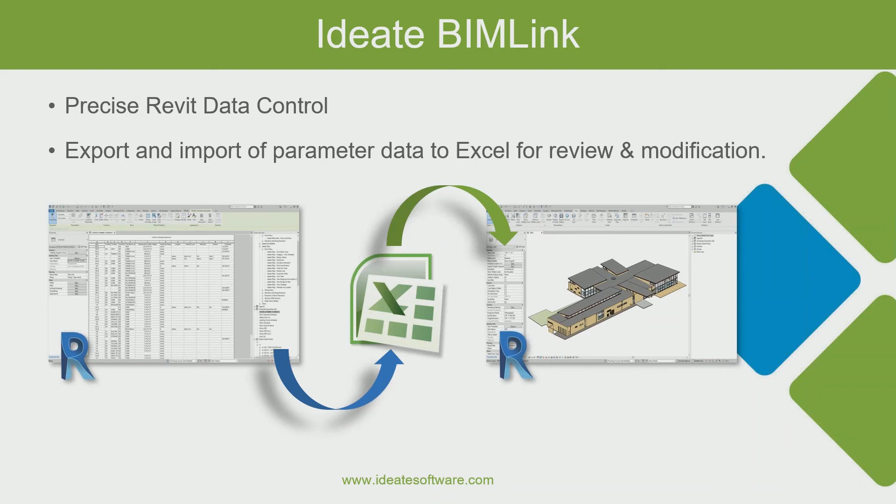So what we've done is we've added, again, these are requests that we see from our customers. In the view templates, you were always able to rename the view template and assign the template to different views. But when you look at the properties of that view template, the controls, a lot of those controls weren't accessible. So that was a request from our customers to have more control.

So what we've done is we've added top-level access to the properties that you see on the screen here that are in yellow. And what I mean by top-level properties is, a good example is the VG overrides. That's where you say edit, another dialog box appears, and you actually have to go into what I'd call subcategories, or multiple dialog windows. In that case, that was difficult for us because the way that the Revit interface is designed, there actually were several dialogues.

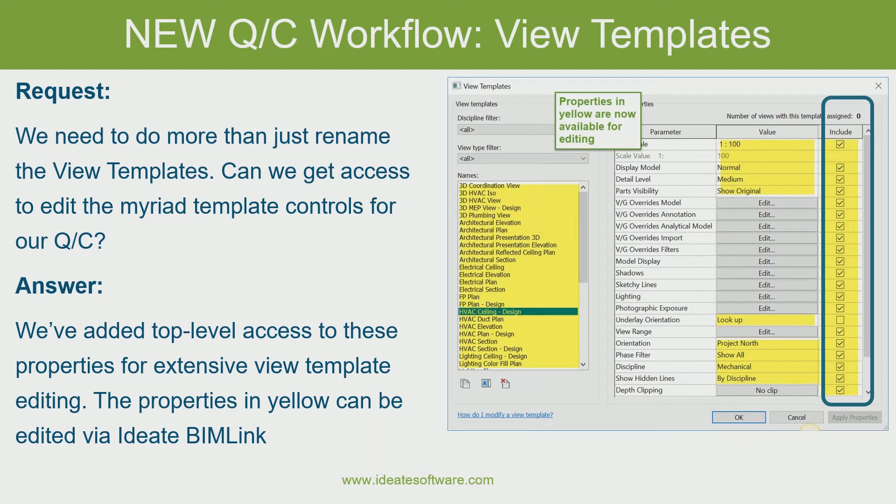So those that don't require a separate dialogue where you have to go into multiple areas are now able to be controlled. So that's why I say top level categories. So you see there as an example, being able to display the model, or detail level as medium, fine, or coarse. Those things can now be controlled much easier.

And so you'll see there an example of being able to tick that, the fact that you can apply the VG overrides. You can apply the detail level, or in this case, the discipline. You have access to whether it's architectural, structural, coordination, or MEP. So a lot more control over the individual properties of the view templates, not just allowing you to apply them to a view, but being able to manipulate the properties.

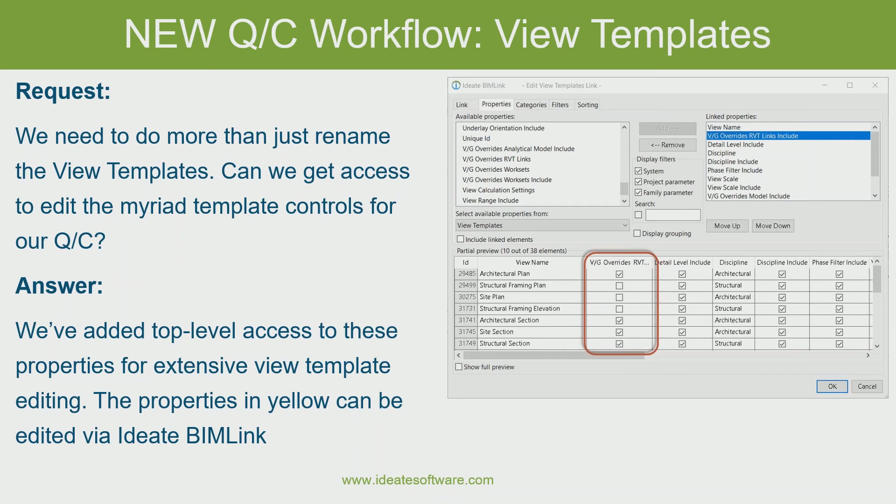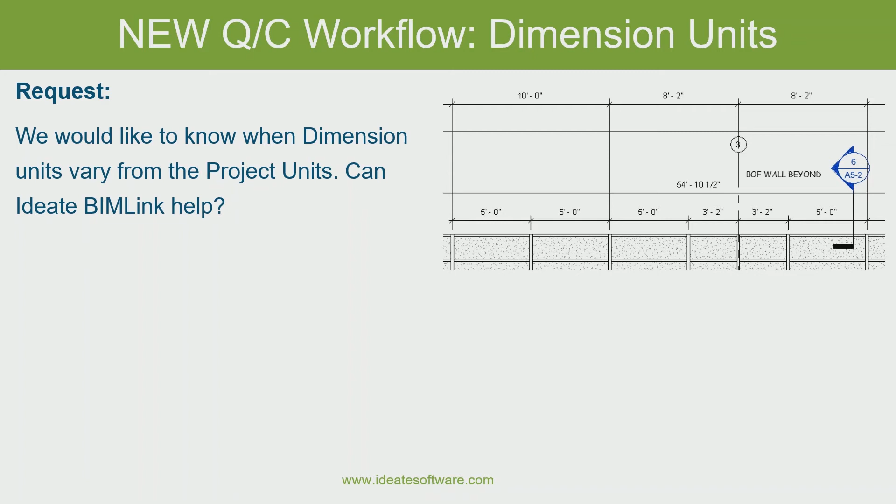And then another request that came in is being able to understand if the dimensions vary from the project unit, so in Revit, you set what the default project unit is for your dimensions. So now we've added the ability to say that we have alternate units here, and then there's a unit format, so now we've added a couple to our link definitions. And if you're familiar with Ideate BIMLink, you know that we do a lot of work up front to define these link definitions, to get you started.

So I'm going to switch over here to Revit real quickly and just come over here to my Ideate Software tab. And just to highlight again, when I talk about these link definitions, what I'm doing here is doing the load sample, right? And so when I typed in QC, I can go down to my quality control links, and you see there's all the QC links that I have here.

So for instance, in that particular case we were talking about QC dimensions. So let's come over here and search here for dimensions, right? And now that particular link has those properties built in by default. So now you notice that I see alternate units prefix, alternate units suffix.

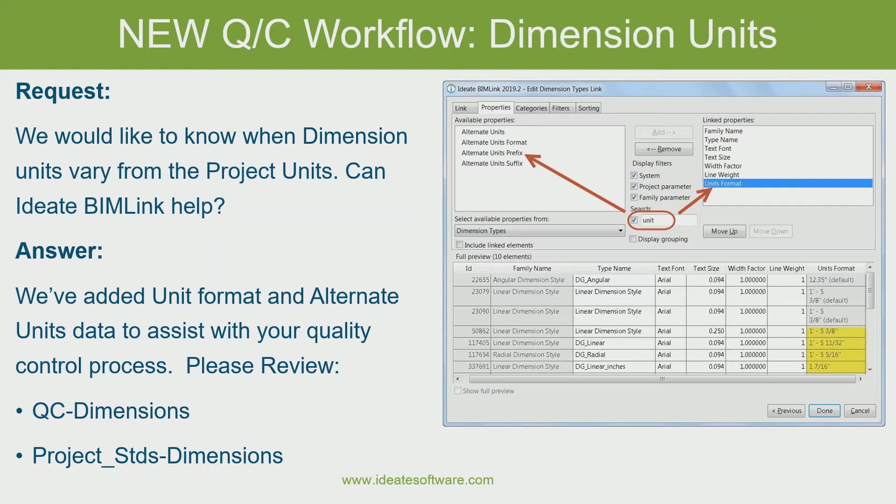So we've set that up for you. And of course, at any time, if you don't like that as an example, like the prefix or suffix, you can remove those, or you can just modify these sample links however you like. But under the QC dimensions and the project standard dimensions, you now have those available properties.

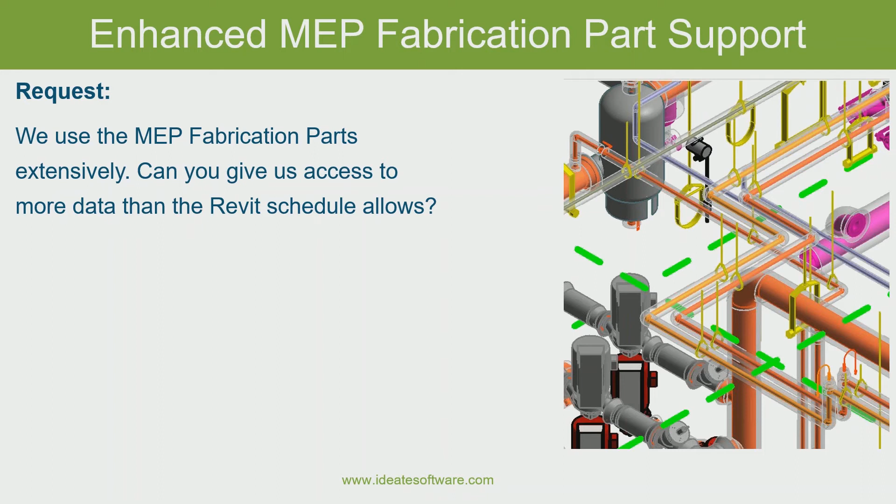And then we've added a lot of MEP fabrication part support. If this is your particular area in MEP, you know that Autodesk has made a lot of advancements on the fabrication side of things. And so we want to make sure that we're accessing that data. So now we have new links, and you'll see here, if I just type in FAB into the search window, all of these MEP fabrication, containment, ductwork, hangers, pipework are now available as default links that are already defined for you to use.

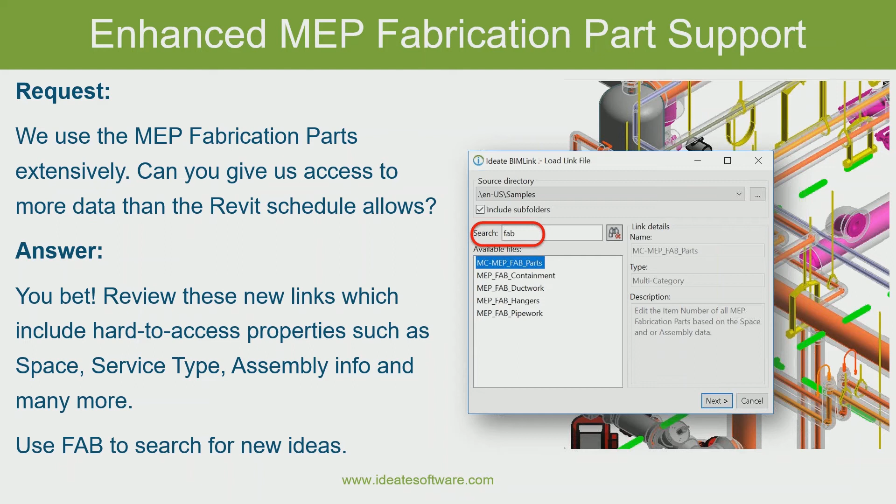And then, we had people requesting the fact that they weren't making any changes to the link definition, but because of the way that Ideate BIMLink worked, if there were multiple people in the file, it was basically locking out the first person that opened up BIM Link. And even if you were just exporting a link, it would say you don't have access to that. Now we're not checking out that data storage element for exporting and importing.

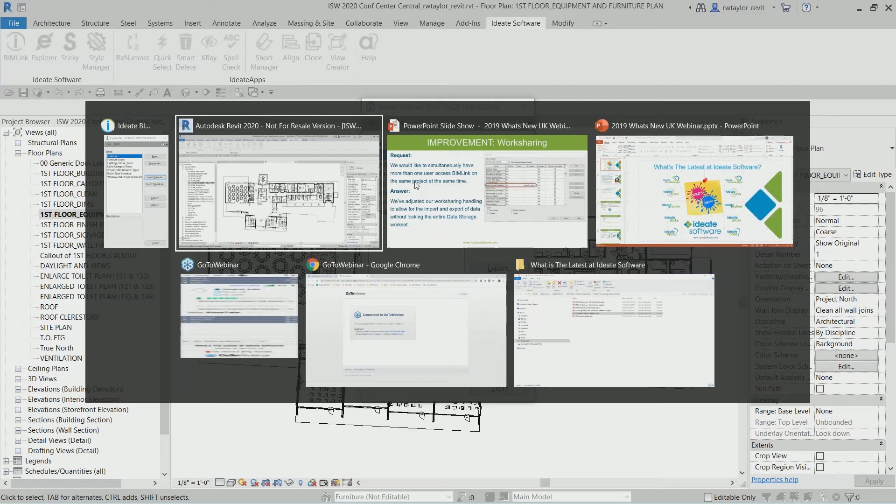So someone that's making a change to the link, like in this particular case, I'm in BIM Link and I'm, let's say, adding some properties, I've actually checked out that data storage link. But if another person is in the same project and also using BIM Link, they have the ability now to just say, I want to take this furniture and export it, or import it. So the two aren't conflicting. So if you are in a larger firm where you've got multiple instances of Ideate BIMLink in the same project, they're going to be working and playing together a little bit easier.

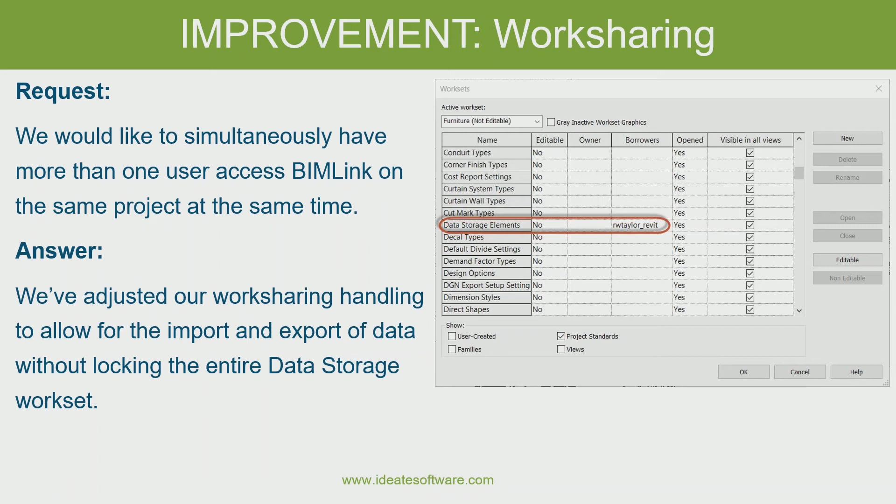And then, as I mentioned, we did a point release in November of last year. What we've typically done is release the major version to coincide with the Revit version. In this case, Revit was updated to 2020 in April. So just a few weeks after, we updated all of our software solutions to 2020 and also added new features and enhancements.

But along the year, we typically do a point release. So I just wanted to highlight some of those things from BIM Link from last year, which was we added the live editing, which I'm going to show in a moment. I'm not going to read every single bullet point here, but we did make quite a few enhancements and feature updates to Ideate BIMLink in November 2018.

And one of the largest things that maybe people aren't aware of is this new live editing, meaning that if you're working with Ideate BIMLink, exporting the information to Excel, making changes, importing that data back, now you don't necessarily have to go to Excel for, typically, small changes. If you want to modify right in the dialog, you can do that. So we've added this live editing.

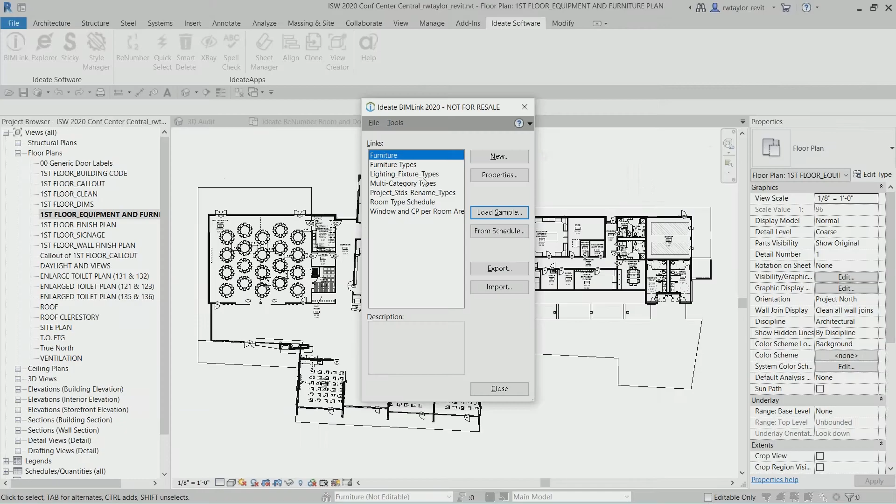So now I'll switch over to Revit, and we're going to say from schedule, and I'm going to come down to my existing schedules in my project, go to a room schedule here and say next. You'll notice that the properties I have are the room number, the room name, the room area. And I've got some finishes here that I might want to remove for this particular link. So now I'm just showing the room number, the name, the area, and the room type.

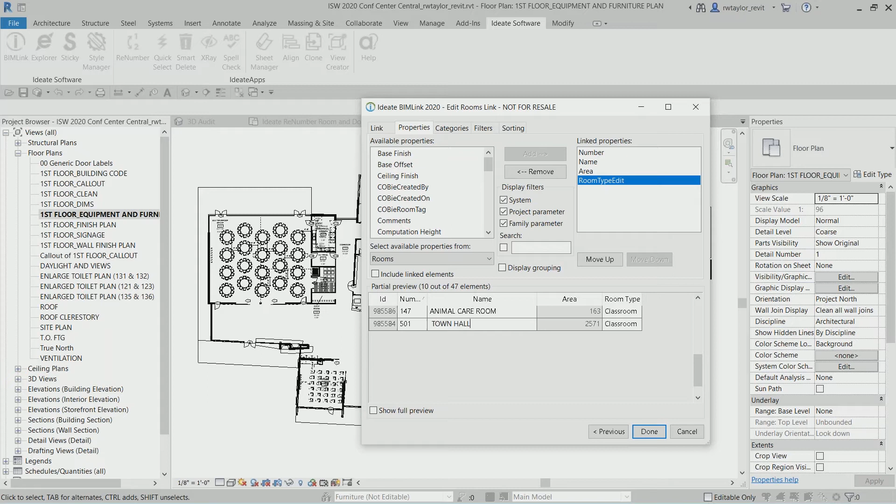And this is now a live dialogue. So if I come over here and say that the room number is going to be 501, and this is now going to be, I'm going to do my caps lock on here, a town hall meeting space. And now when I say done, that initiates that change.

So if I go over here and zoom up, you can see that now I've updated that information to town hall meeting space. So I've changed that room. If I look at the properties here, you notice that the name is now town hall meeting space, and the room number is 501 over here in the properties palette.

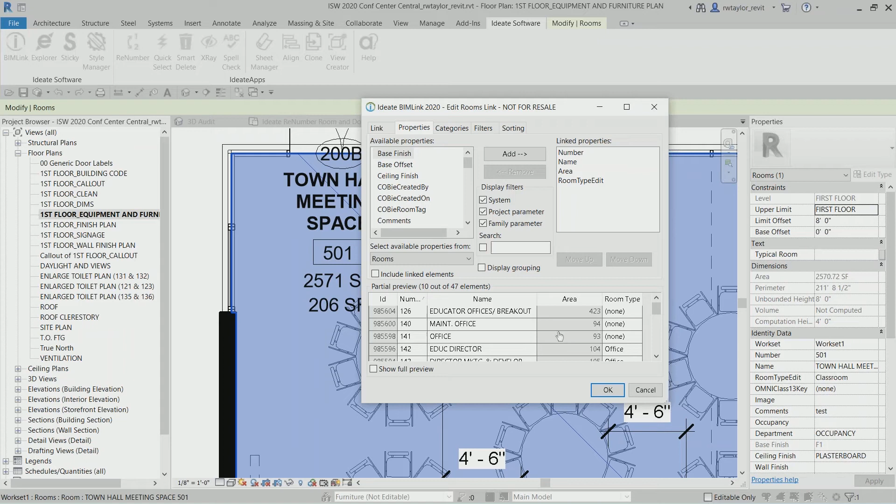So that Ideate BIMLink dialog is active. So again, let's go to the room schedule here, so the properties, for anything that you want to change. And you'll notice that obviously the area is something that I can't change. That's a read-only Revit category.

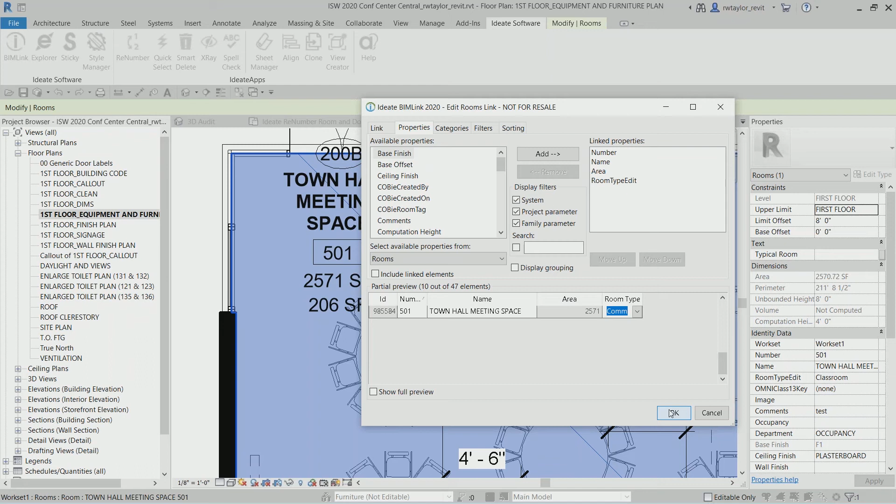But if I wanted to go back to that same room, the town hall meeting space, and change it from a classroom to something else, I now have that available. So maybe that is a common space as an example. So now I'm changing that room type as well. And then when I select on that, you'll notice the room type is now over here in the properties palette: common.

So I think Excel is still excellent for if you're making large changes, but if you need to make those smaller changes, or you want to stay within BIMLink and not have to export out to Excel, that's a really nice feature to be able to do that live editing.

And then we also in November gave you a lot more ability to change information in object styles. We were always able to have certain properties associated with them that we could change. But now we can do things like change the line color and the line pattern and the line style. So a lot more of the properties are exposed, not just for reviewing, but also editing.

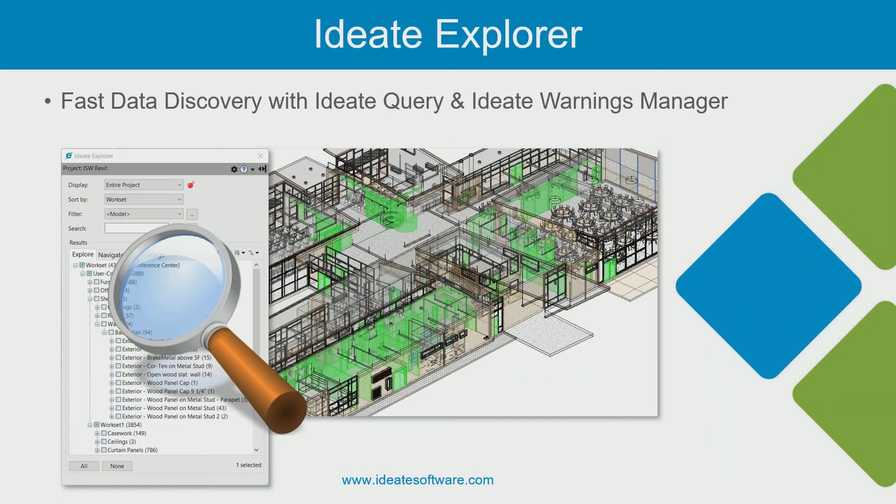Okay, so that's kind of a quick overview of Ideate BIMLink. Now I'd like to get to our next solution, which is called Ideate Explorer. If you're familiar with Ideate Explorer, it's all about fast data discovery of your Revit project with our Ideate Query and our Ideate Warnings Manager. Hopefully you're familiar with the Warnings Manager. We added that a little over a year ago, and we've continued to improve the warnings tab and the warnings tools.

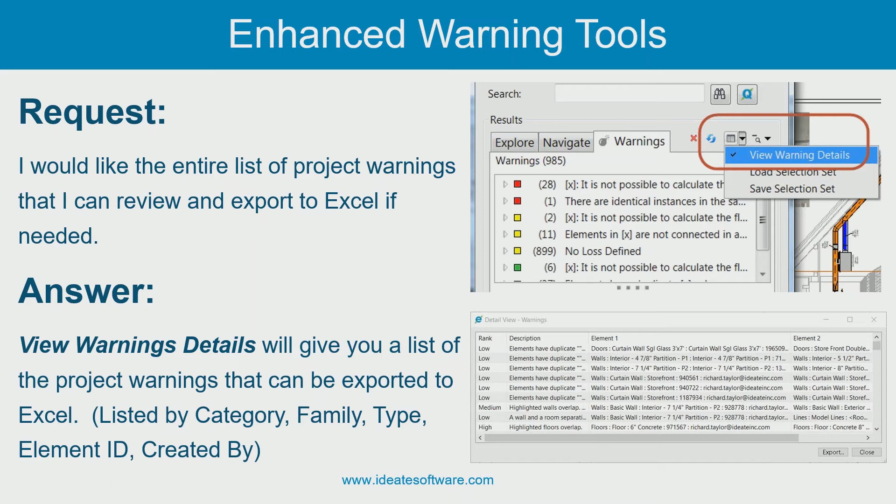So one of the things that people had asked us is they'd like to be able to have a list of all the warnings within the project and be able to export that. And so now we're able to view a detail list of all the warnings, as you see there, in our normal detail view, and then export that to Excel. It's listing category, family type, element ID, and the created by for the warning. So that's a nice feature.

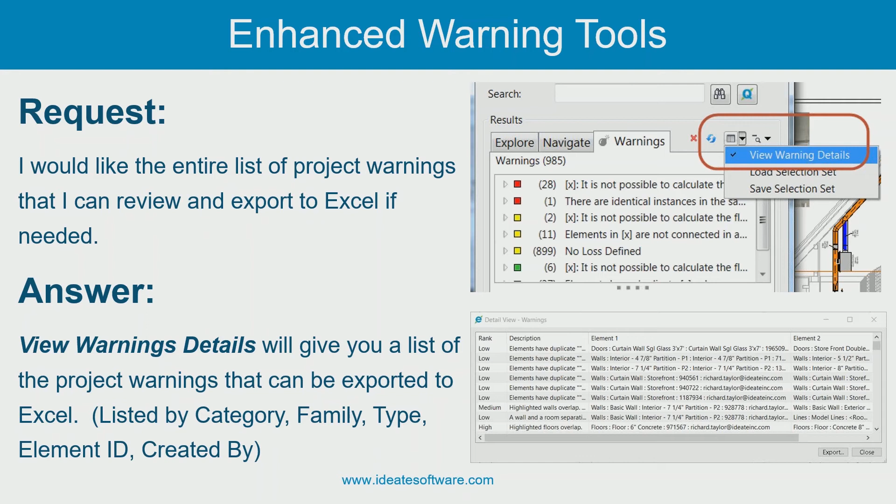And then we have a new workflow here that allows you to actually fix some very common warnings, like the duplicate instances. So now you can right click and say retain originals or retain latest. And I thought I'd show you that. So if I come over here to Revit again, let's bring up Ideate Explorer.

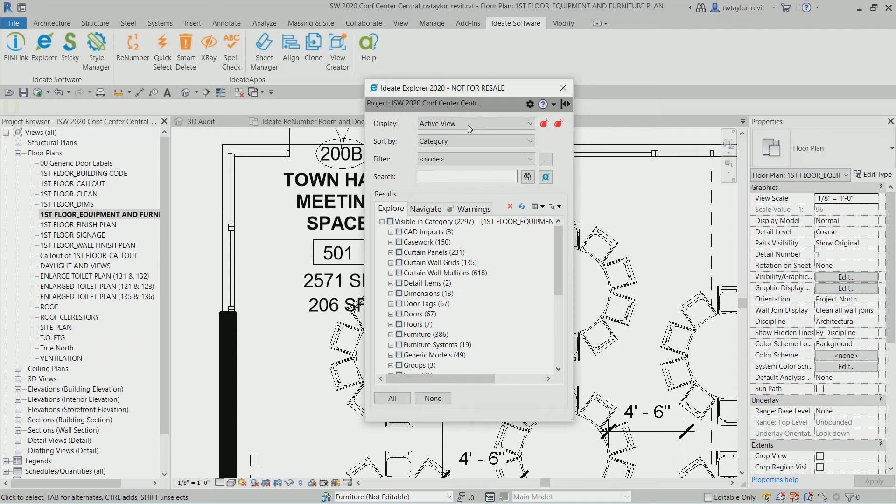And like I said, hopefully you're familiar with the fact that we now have our warnings tab. I'm going to switch over to the entire project here. This is showing me all elements. I've got 36,000 elements here, and the Explore tree has all of them organized by category. But Navigate allows me to navigate to legends, schedules, sheets, and views, organized by views that are on a sheet or not on a sheet. So we're organizing all of these in a very logical way.

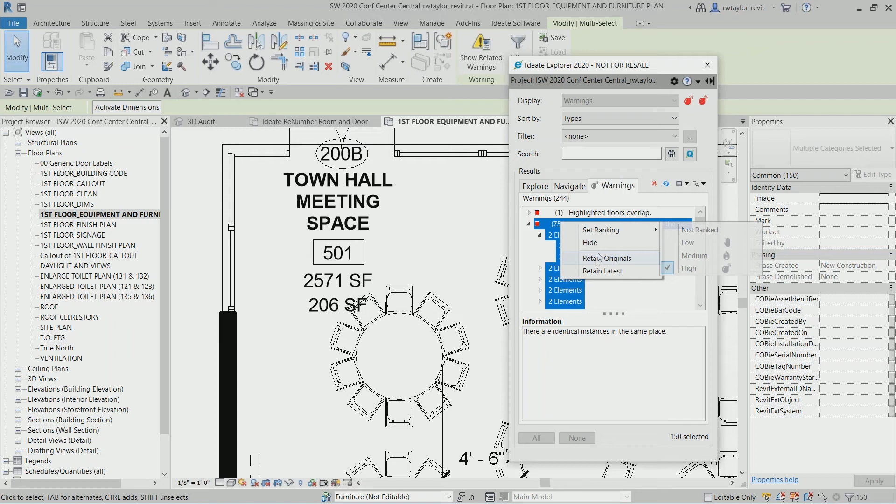And then the warnings here. So now I have 244 warnings. You'll notice that there's this identical instances, right? I've got 75 and I can look at these individual elements. Some of these look like curtain wall mullions. Or I can go to the top level here, right click, and basically say retain originals or retain latest. I know these are all duplicates, so I'd like to retain the original.

At this point, it builds a selection set of the original based on the element ID, so the lower element ID is the original one. And you see here that we have 64 curtain mullions and 11 pieces of furniture. Now, in my particular case, maybe there's a reason why the curtain wall mullions were duplicates. I had some overlapping curtain walls, but for the furniture, there should be no reason for duplicates. So I don't want to delete all of them, I just want to delete the furniture.

So what I'm going to do is cancel this. That just cancels the deletion for the time being. They're still selected. So I want to go back to my Explore tab. I'm going to switch the display to my current selection. And you'll notice that I have 75 elements here, right? I've got 64 curtain wall mullions and 11 pieces of furniture.

I'm just going to untick the curtain wall mullions. So now I have those 11 pieces of furniture that are duplicate. Then I can go to the Ideate delete here, and now I'm only deleting the furniture. So even though by default it comes up with both of them, I have the ability to sub-select and say, well, you know what? I didn't want the curtain wall mullions. I only want the furniture. So now I'm going to delete that.

Now, if I go back to my warnings, notice how it says 64? All 64 of those were the curtain wall mullions. So in this particular case, if I'm done with that, I might want to say, you know what? Those are fine. Let's just hide those, meaning they're not going to be part of my warnings. So now I have 169 warnings, right?

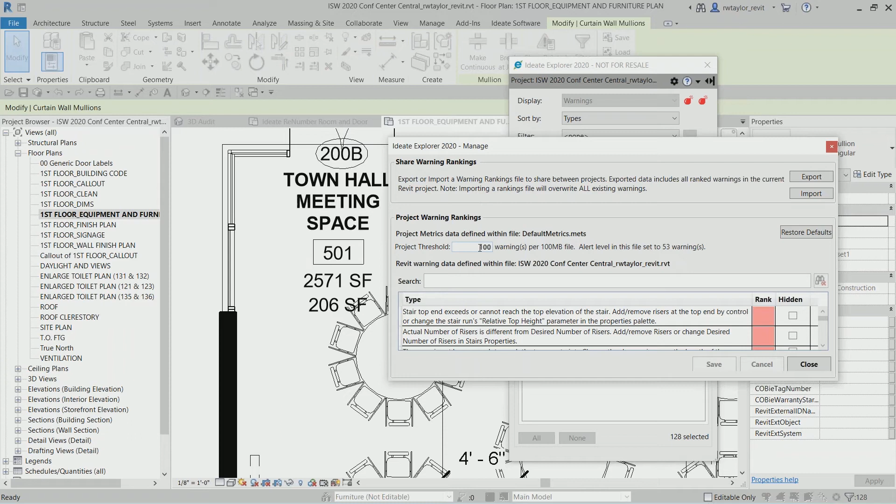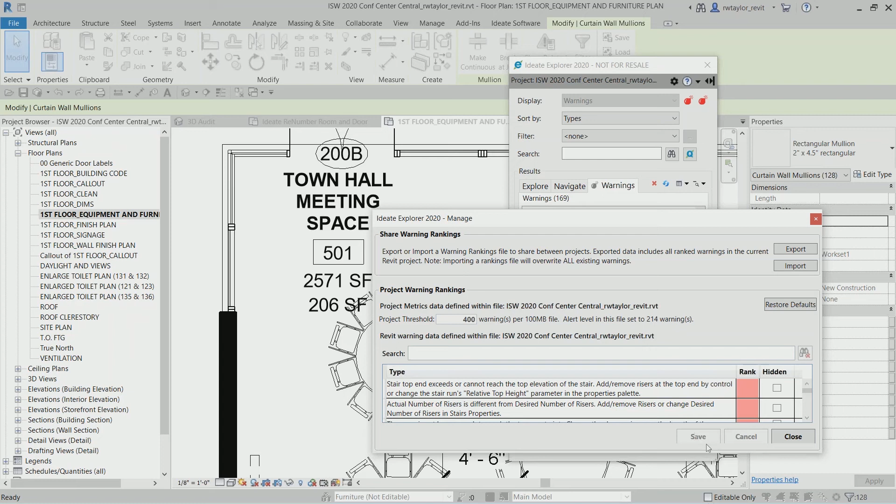Another thing I'm going to show here is that I do have 169 warnings. If I come over here to my manage, I have a threshold here. So I've said there are 100 warnings per 100 megabyte file, which allows me 53. Well, 169 is above that, so that's why I have an alert icon here. But if I change this to like 300, actually it doesn't quite get there. Let's make it 400. That's going to go to 214 warnings. So I'm going to say save and close. And now that second alert icon is no longer displayed.

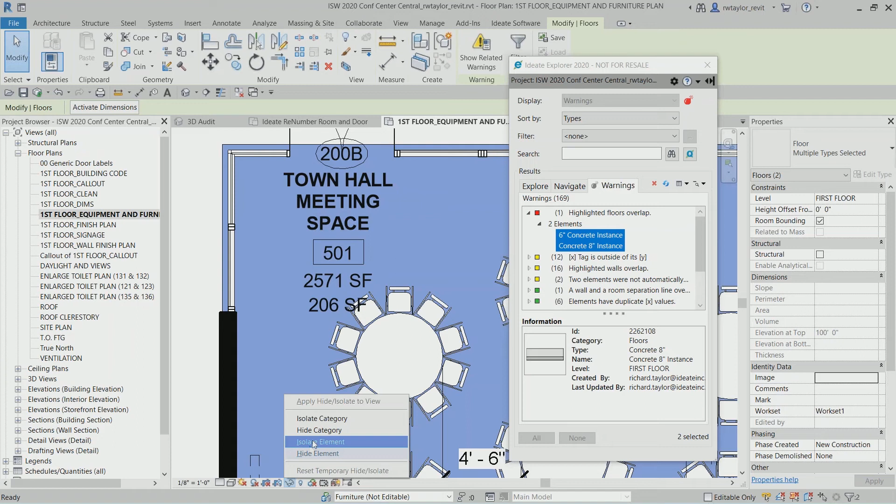The reason this first icon is displayed is because I do have a warning that says highlighted floors overlap. So I can select both of those real quickly here with the control key, and say that I want to isolate those elements. I just want to look at those two elements that I selected. And I can see pretty easily where that floor overlap is. So now I can edit the boundary, bring that back and fix that, cancel and say no. Now because I fixed that warning, there are no high-level ranked warnings based on my ranking system, and so that alert icon goes away.

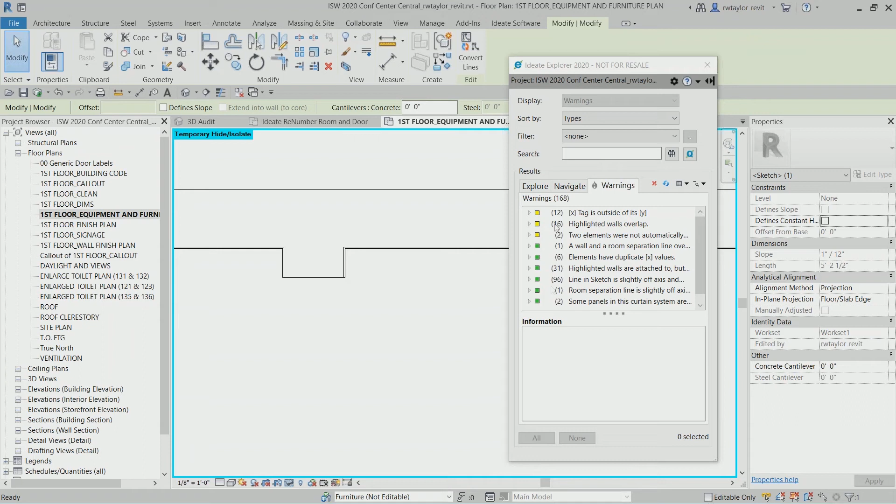So there were two alert icons that I just removed. One was the number of high-ranked warnings. The other one was the threshold, and now 168 is below my threshold. So I can continue now fixing these warnings. So again, I can switch over here to Explore or to Navigate. So let's switch back over here. So that was a new workflow that was requested, the ability to fix some of those common warnings like duplicate elements.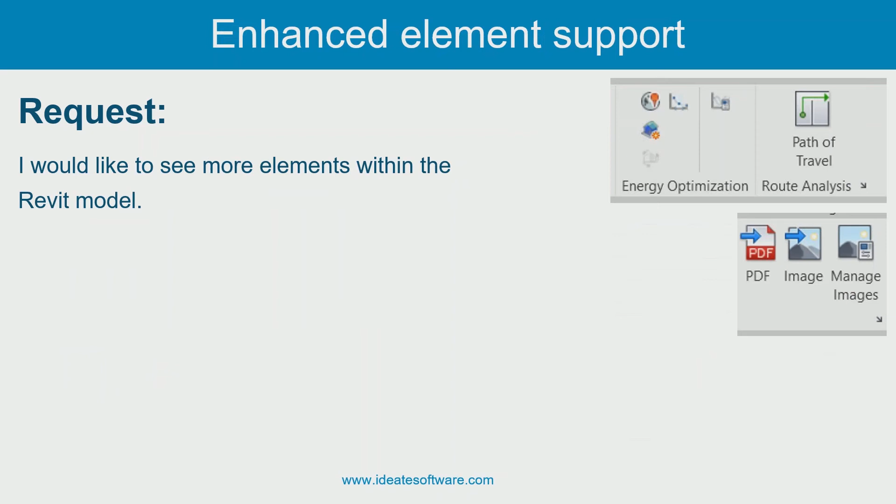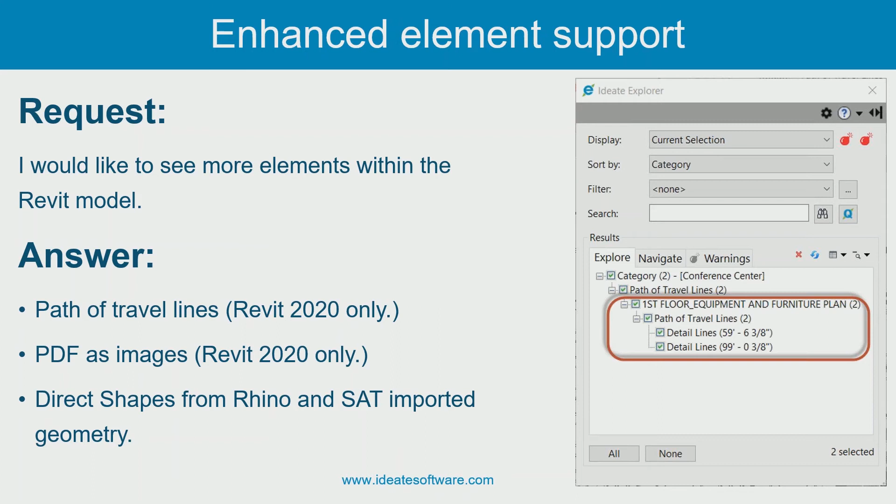Also, with every new release, Revit always adds elements, so we want to make sure that we are looking at the same elements. So for Revit 2020, we added the path of travel. We also added PDF images, a new feature within Revit. And also being able to review geometry that is imported from Rhino and SAT, which is a 3D format. Revit looks at those as direct shapes. That's the name it calls those when you import that geometry. And so we're able to review that information as a category for direct shape.

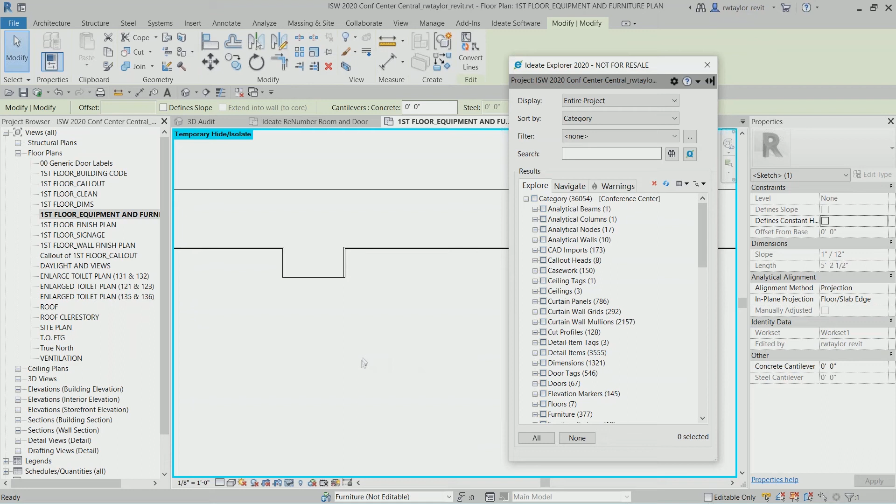And then with Ideate Query, we're giving you more information. Remember I mentioned with Ideate BIMLink, we have more access to the fabrication parts. So we've added that to Query, as well as selecting elements by their pin status, which is a nice feature as well. If you're not familiar with Query, let's go back over here to Revit. I'm going to reset my temporary hide isolate, so now it's going to show the entire model.

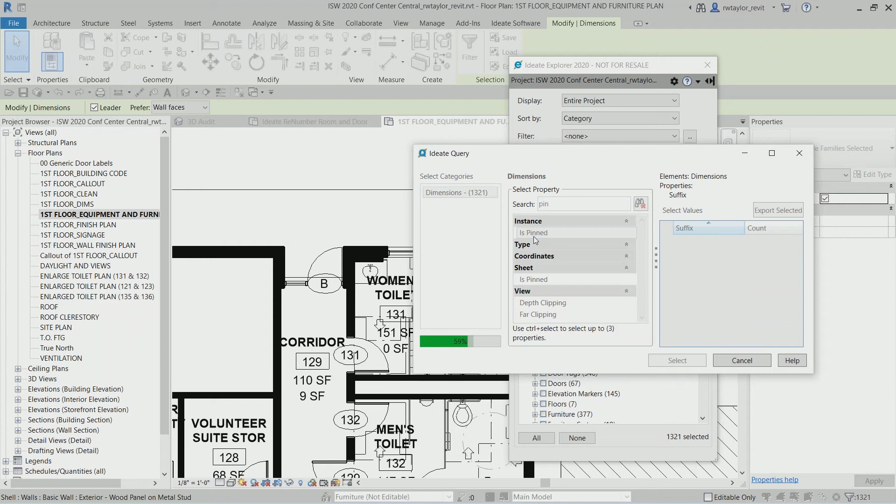Let's say I wanted to come down here to dimensions, and as an example, I have 1,321. Query allows you to dig a little deeper, and it gives you those properties and says, okay, I would like to have, let's say, the suffix, what is its value. And maybe I also want is pinned, whether that dimension is pinned. So I can add that. You see that most of these are false. I can add up to 3 different selections and dig a little deeper. So as an example, there are 2 that are verify in field.

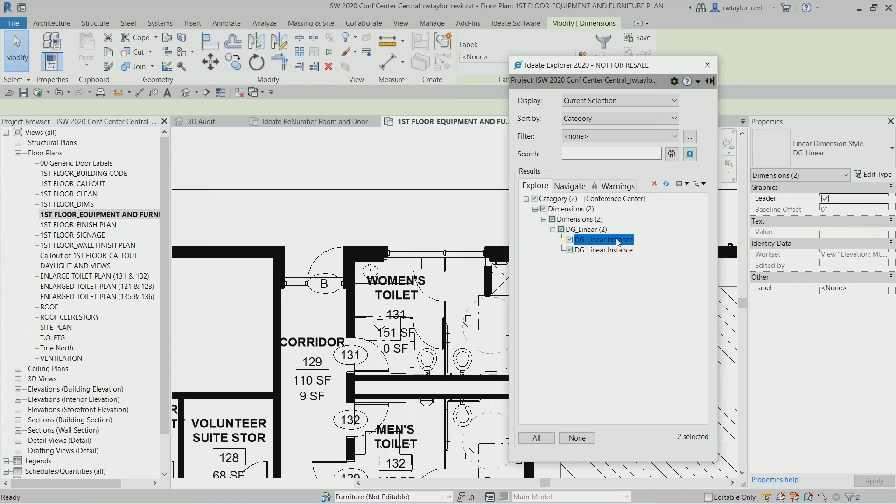So if I select those two, it's going to build that list, and then I can decide where exactly those are located. So let's go ahead and fit that. And you can see that there I've got the verify in field this particular dimension that is accessed. So it allows me to query on the property values and be able to dig a little bit deeper.

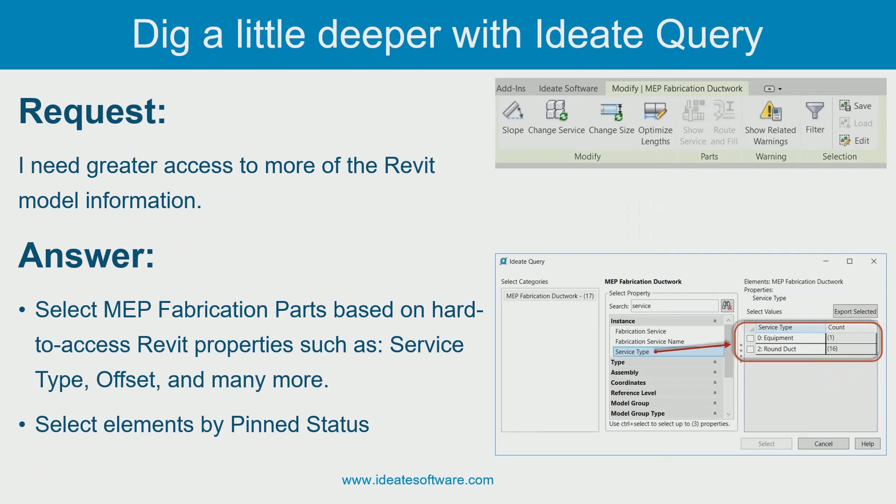And so, like I said, we're always adding new properties that are exposed. And then I already mentioned this in some ways. We did an update in November, which is our point release, and we added the threshold, and that's what I showed you there. We were always able to import a warnings ranking file, right? But now we're giving you the ability to not only import that ranking file, but be able to change the ranking status.

Before this sort of interface, you actually had to edit the XML file, which was really kind of cumbersome. But now within the dialog, you can choose a particular warning and say whether it's high, medium, or low ranked, or not ranked at all. So that interface allows you to decide what your warnings ranking file is, and then be able to save that off as a company standard.

And then our third solution is Ideate Sticky, which allows you to link Excel data into Revit with exceptional visual fidelity. It works with Excel like Ideate BIMLink does, but Ideate BIMLink's all about the data, if you're updating, as you saw, some of the parameter information from Revit through Excel and then back into Revit. Sticky is also working with Excel, but what it does is it takes the Excel spreadsheet and just links it in as a schedule.

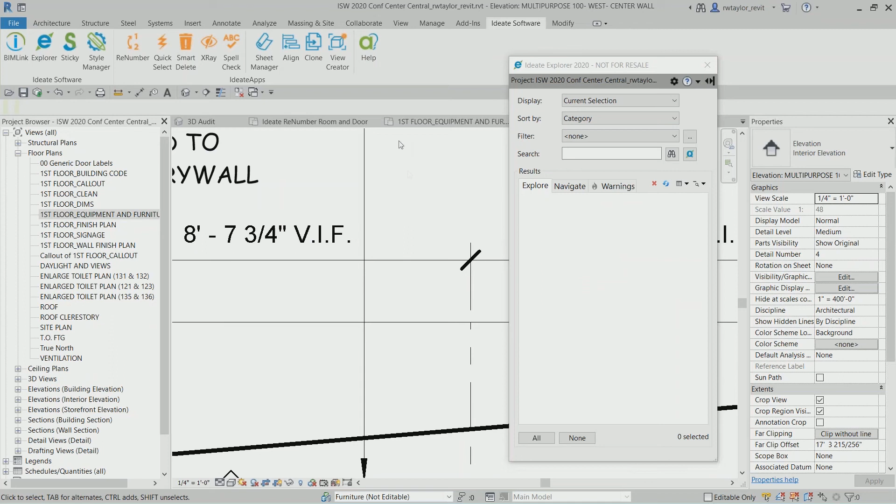So if you've got, let's say, general notes, or maybe some manufacturing data, or data that's in a tabular format that you just want to link in, Ideate Sticky allows you to do that. I know some people maybe aren't as familiar with Ideate Sticky, so I thought I'd go ahead over here and select under the sheet. I'll just do a quick example where I would select Sticky, and then I'm going to say create, and I've got some samples here, and I'll go out to my lighting fixture here, and I'll just pick now.

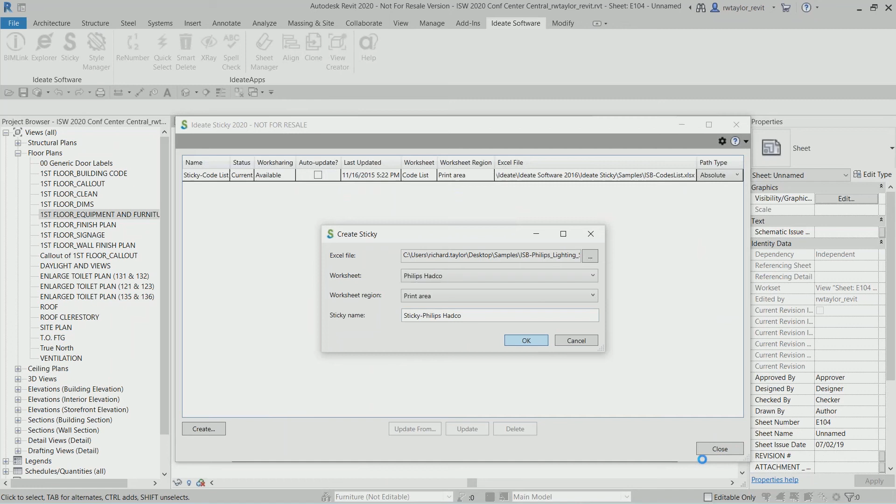You can choose from different worksheet regions, right? So for instance, if I wanted this Hadco lighting, I could select OK, and then that's going to bring that in as basically now a schedule, and it's actually linked. So if the Excel file changes, it's going to update as well. So if I go over here to Sticky, you can see in the dialog that it's current and that it's available for editing this particular schedule and when it was last updated.

And you're going to see this is actually fairly new, this ability to have an absolute or a relative path. Absolute is the location on the disk. Relative allows you to store that Excel file underneath the project. And so with that, we've actually done a couple different updates. You saw those worksheet regions. We've done a lot of work to increase the performance of Ideate Sticky. So if you have a spreadsheet that has lots of named regions, as you see worksheet regions there in the example, the performance is going to be significantly faster.

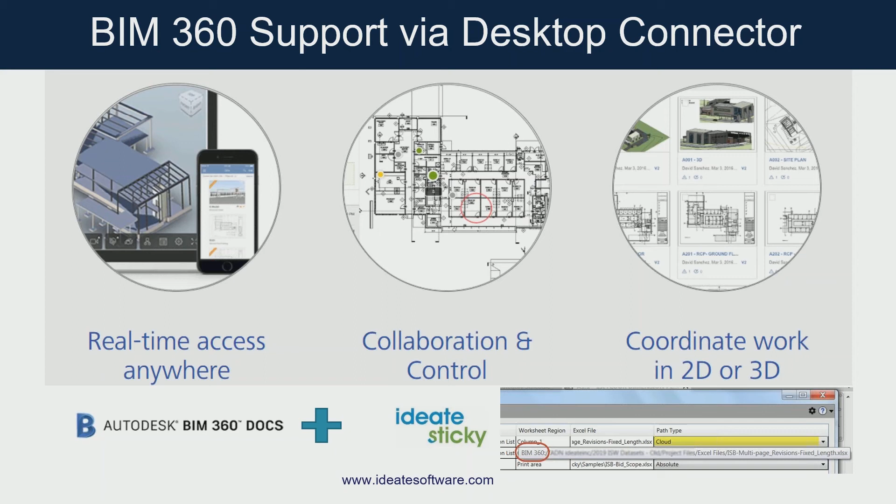And then I already mentioned this: in previous versions of Ideate Sticky, it was only an absolute path, so we basically had the exact directory location. Now you can choose to have a relative path where it's stored underneath your project folder. And we've also done a lot of work making sure that it plays nicely and works well with BIM 360. So if you're using the desktop connector with BIM 360, you'll notice that that is now supported. In the example there, you see that the whole path starts out with BIM 360 and then it has the file location.

And then we're always continually getting feedback from our customers about specific formulas and data within Excel that needs to be displayed correctly when it comes over to Sticky and shows in the schedule view. So you see there we've done a lot of improved support for formulas within Excel so that the resulting value of that formula is going to display properly on the Revit side with Ideate Sticky.

Many of you are familiar with IdeateApps, our collection of 9 productivity tools for all Revit users. It's all about focus-driven data manipulation and organization within your project. We have a whole series of applications or tools focused for all Revit users: Ideate ReNumber, Quick Select, X-ray, Spell Check, and then our sheet and view tools shown in blue - the Sheet Manager, Align, Clone, and View Creator.

We did some updates for the May release, updating several applications - you'll see Ideate ReNumber, Ideate Quick Select, and Ideate Clone. We're also in a current survey where we're looking at making major improvements to Clone, View Creator, and this ties into some feature updates to Ideate BIMLink as well, being able to create new views and sheets as part of this process. If you're an existing Ideate Software customer, I encourage you to join our beta program so you can have access to that survey.

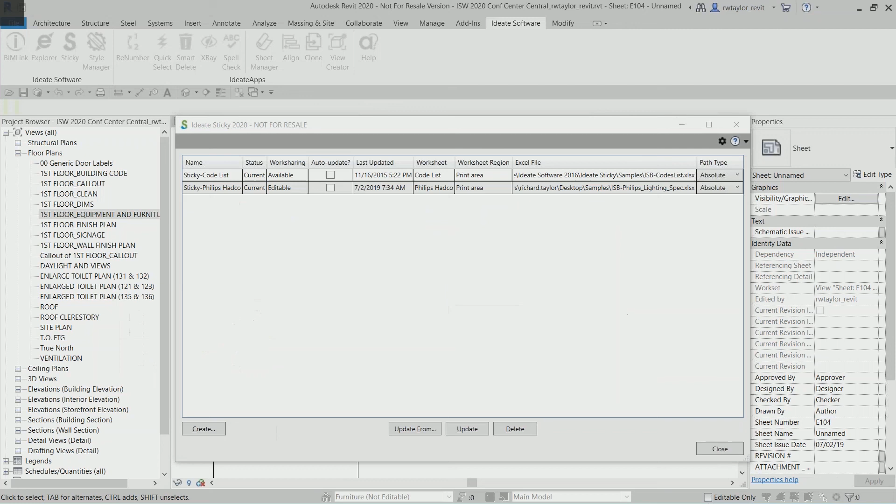So you'll see that within the actual VG categories, if I access this to show you where this is, if I go over to Revit and I have a particular subcategory that I've created under ceilings, I can create new ones, or I can delete those subcategories. Not the top level categories, because that's baked into Revit, but anything that I've created or custom content that's been loaded in, I can remove.

But I have no idea if removing that is going to impact the visual display of my drawings. Is it even being used? And if I delete it, like for instance this clearance that's RGB 160 with a dashed dot line, what does it become? Well, it actually gets reset back to the top level category. So in this case, if I deleted that clearance, it would be set back to plumbing fixtures, which is the top level category set to black solid. Now that may or may not be what I want.

So it's good to understand these items, and that's where it's all about the risk assessment. In this case, what if I remove this line style or make a change? What is it going to impact? Ideate StyleManager is all about showing you what information is going to be impacted by those potential modifications. Again, you need to merge non-standard materials or non-standard styles together, and now this is giving you a way to do that.

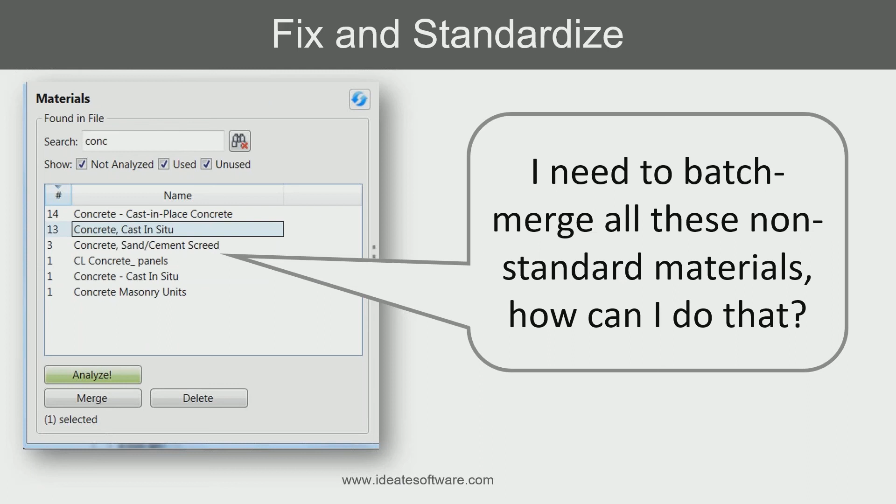So let's take a look at this. I'm going to come back to Revit, and come over to my first floor equipment plan. It doesn't really matter which view I'm in, because Style Manager looks at the entire project. So when I first bring up Style Manager, it brings up some information - there's a quick start guide, some frequently asked questions - but you'll notice I can browse to these different styles. Scope boxes, view templates, filters, material appearances, and materials are not necessarily styles, but we kind of put them all together into managing these pieces of information.

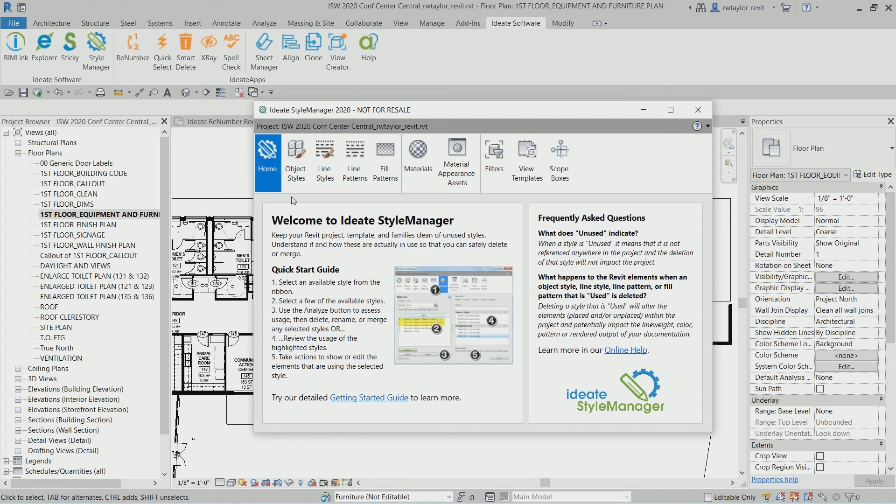A good example is line styles. If I select on that, it's going to say well, these are all of the line styles that are defined in the project. And right away, you see some colors here - those colors represent duplicate pieces of information. So for instance, this Line 0 and this Line 00 actually have the same definition - the line weight is 1 and the color is 0.

So as an example, let's take a look at those two, and I can now analyze them and ask, well, are they being used? In this case, this Line 0 is actually being used by 148 pieces of information. It's in a group, it's also under elements, and as I scroll down here, you'll see all these things are using that particular line style.

So I now have the ability to either rename that, or I can merge it. In this case, I know that I could actually remove this, so I can say delete, because nothing's using that - I know that's okay. And you see here it says lines, it was removed, and that's fine. So I can go through and start to look at this information.

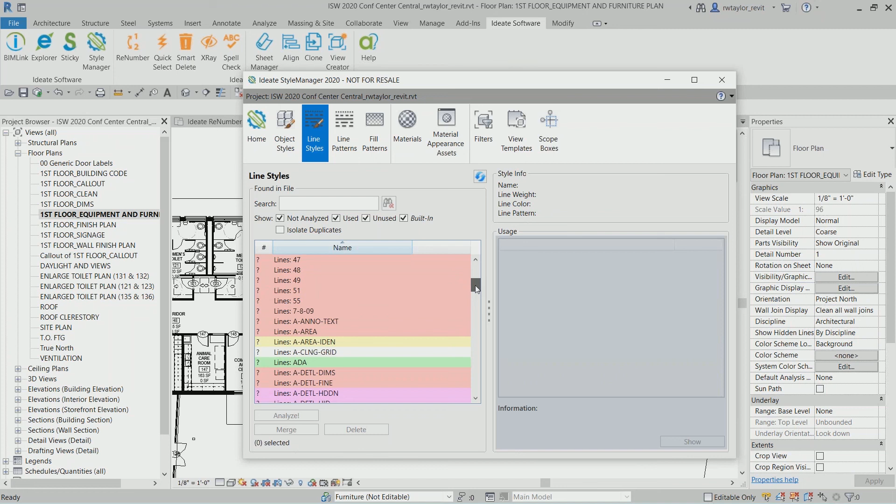If I come over here to, let's say, fill patterns, I can say well, you know what, I want to search for concrete. And there you see I've got this information - the question mark means it hasn't been analyzed yet. So what I'm going to do is shift-select all these and just say analyze. So now all of those fill patterns that match concrete, it's going to go through the entire project and see where they are being used, and then it gives me the information so I can decide whether I want to delete them, rename them, or merge them together.

You can see that the selections here let me show me the ones that I haven't analyzed yet, or show me the built-in categories I was talking about. In this case, this concrete model has zero, so I can get rid of that. This insulation is under three detail items. Masonry concrete block is used in quite a few of these different families.

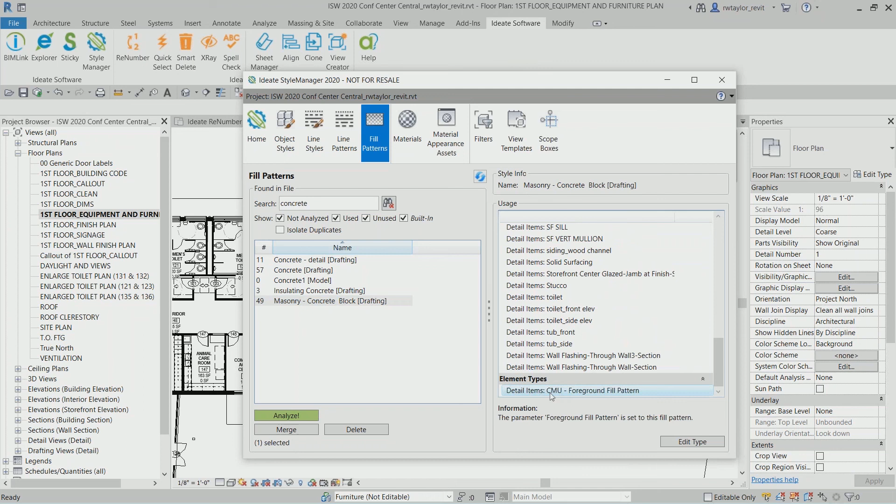There's also a detail item for CMU, concrete masonry unit. But I have the ability to select on these families, make a change, or edit the family itself. If I open up that family, I'm actually inside it, and then I can decide, okay, where's that information, or do I want to change it? It gives me the ability to forensically understand what's going on here.

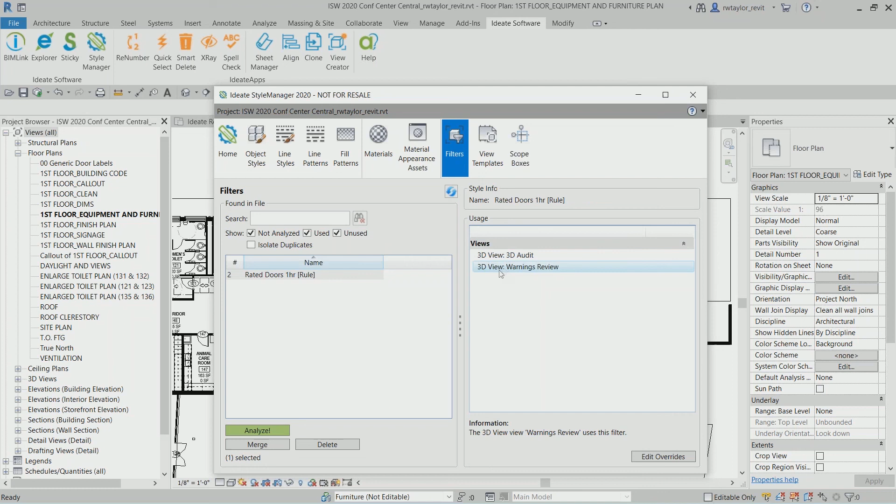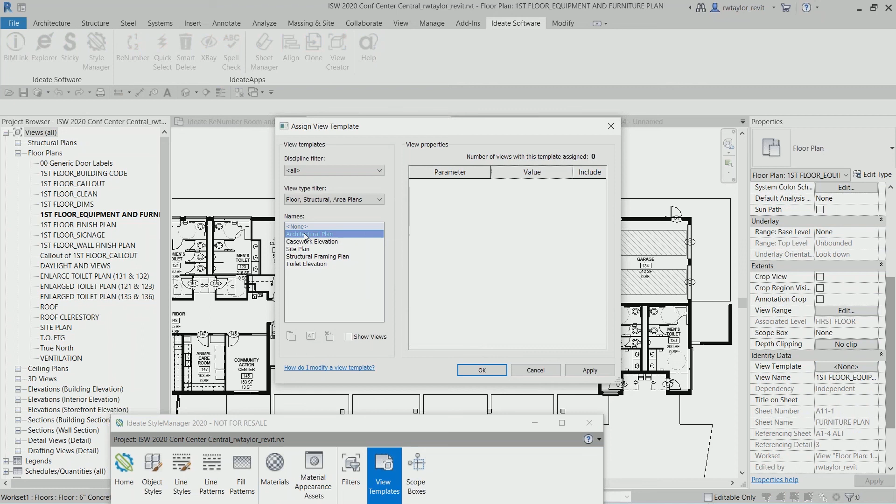So as an example, if I come over here and select this view template, let's do architectural plan, I'm going to select that. And you'll notice that just like with Ideate Explorer, I can continue working in the view while this stays in the background.

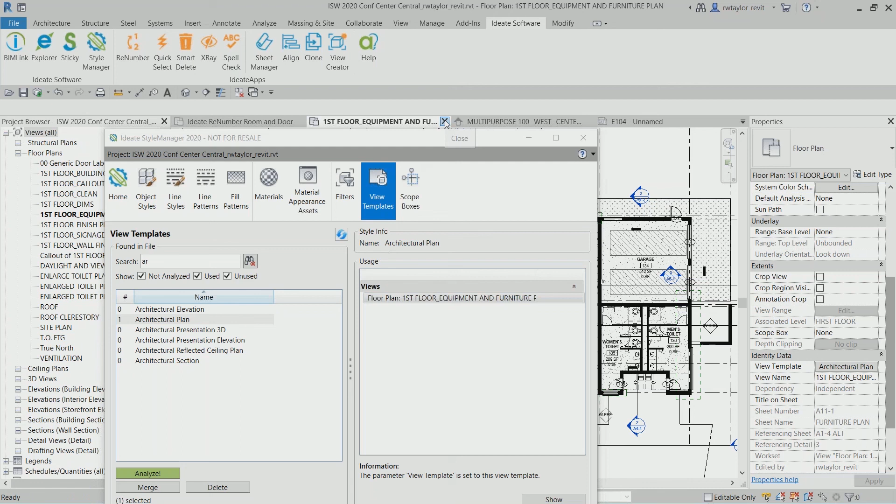Now, because I made a change there, I want to update this. Notice right away, once I refreshed, it says architectural plan, that view template is now used in this view, first floor equipment and furniture. If I wasn't already in that view, I could select show, and that opens up the view where it's used.

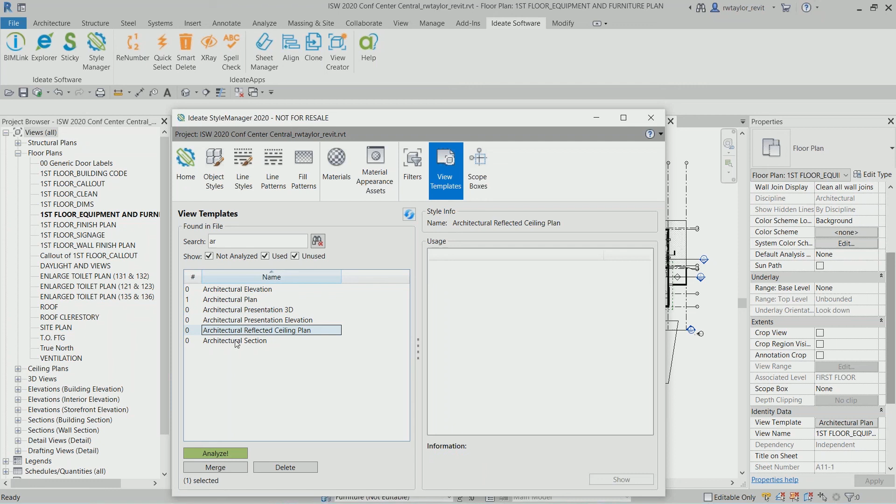I don't believe I have any scope boxes defined in this project, but that would also show as well. So it's nice being able to understand exactly which view templates are not in use, like this reflected ceiling plan view template and this architectural section. I'll highlight those two and delete them since I'm not using them in my project. This window confirms they've been removed.

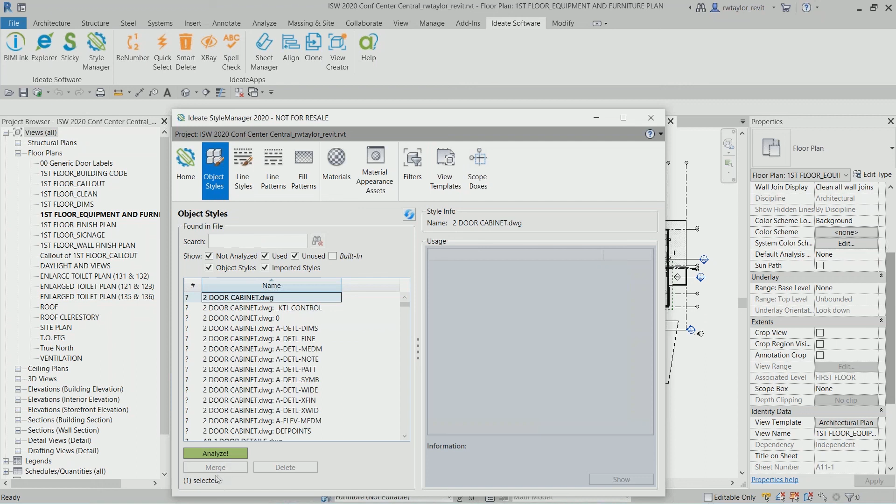So with any one of these, it gives you the ability to analyze, search for things, merge, and delete information very easily.

So with Ideate StyleManager, you can understand when you've loaded all this content in, do a risk assessment. You can fix and standardize pieces of data or information, and delete an imported category or any style that doesn't match your standards.